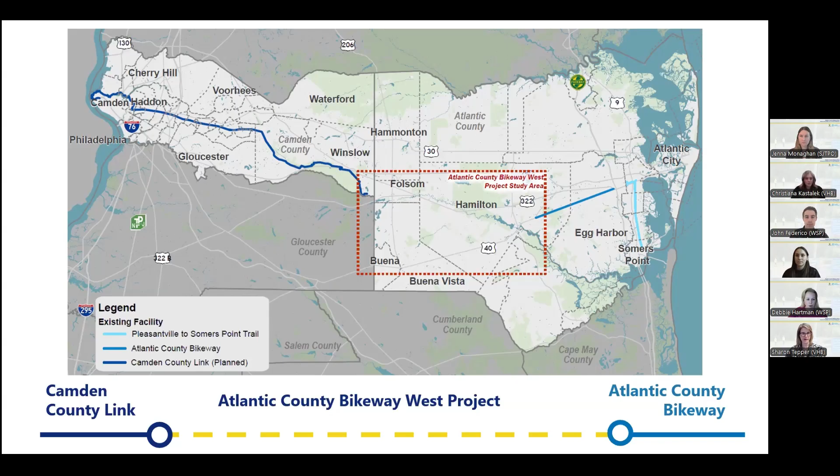To talk a little about how we got to this project point, we began a feasibility study with WSP back in 2020 and 2021. The goal was to connect Philadelphia to Cape May via a continuous off-road multi-use trail network for all ages and abilities. That original feasibility study covered the whole area shown in the red box, looking for a way to connect two bikeways: the existing Atlantic County Bikeway on the east, shown as the lighter blue line, to the planned Camden County link on the west side, shown as the darker blue line. We were looking for a way to connect point A to point B, and that's what we were calling the proposed Atlantic County Bikeway West project.

I'm going to let Christiana take over and start us off with an icebreaker poll. Before we dive into what's being proposed as part of this project, we want to understand how you currently engage with the existing bikeways Debbie just talked through, and other trails in the area. So we'll get started with our first poll of the evening. The polls will automatically pop up on your screen. Once it does, feel free to start responding, then please click submit so we receive your answers. Let me pull up the first poll.

You should have the first poll open in front of you. There's a set of three questions. The first is: how do you generally get around on a daily basis? For this, you could choose all that apply to you, whether you drive yourself, walk, bike, whatever it may be. Choose all the responses that apply to you.

The second question is, have you used the existing Atlantic County Bikeway or Pleasantville to Somers Point Trail before? This is a single choice question. We're looking to understand if you've used these trails before, one or the other, or maybe you haven't used these at all, or maybe haven't even heard of them before. That's what we're trying to understand in the second question.

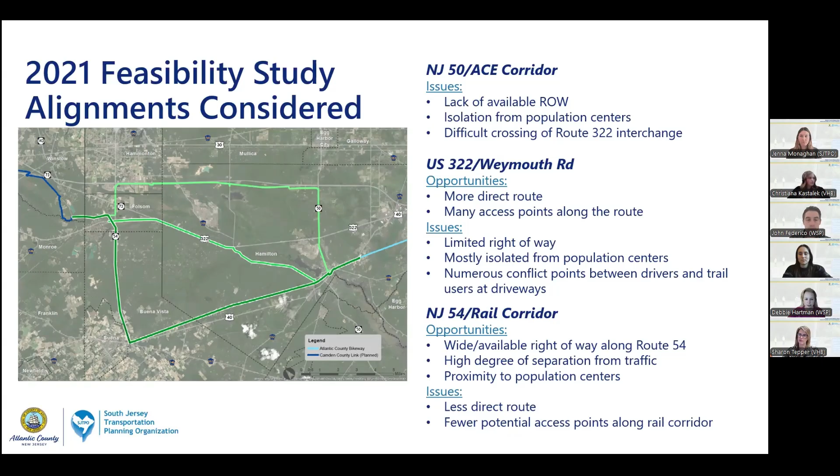Some of the concerns found are that it's a less direct route because it's a right angle instead of a diagonal, and there were fewer identified potential access points along particularly the rail portion of the corridor. That's something we'll continue to look at as the study continues. But that third option, the New Jersey 54 and the rail corridor, did become the preferred initially proposed alignment that came out of that feasibility study.

And that's where this study is beginning, the advanced feasibility and moving into concept development. So this red alignment connects, again, the planned Camden County link to the existing Atlantic County Bikeway to the east. We'll run through a couple of different areas: Folsom Borough, Buena Vista Township in this corner, and finally Hamilton Township, along with a small portion in Camden County. This dark line represents the change between Camden County and Atlantic County, so there's a little portion that will be in Camden County as well.

The reason this was chosen as the preferred alternative is because of that wide right-of-way alongside Route 54, that unused right-of-way for the railroad that parallels Route 40, which gives you that high separation from traffic. There are pedestrian and bike generators in these higher density areas, in the retail areas surrounding Mays Landing, Folsom, and Buena. So within that alignment we came up with 3 focus areas, outlined in the black dashed boxes, numbered 1, 2, and 3, which we'll talk about in more detail throughout the presentation.

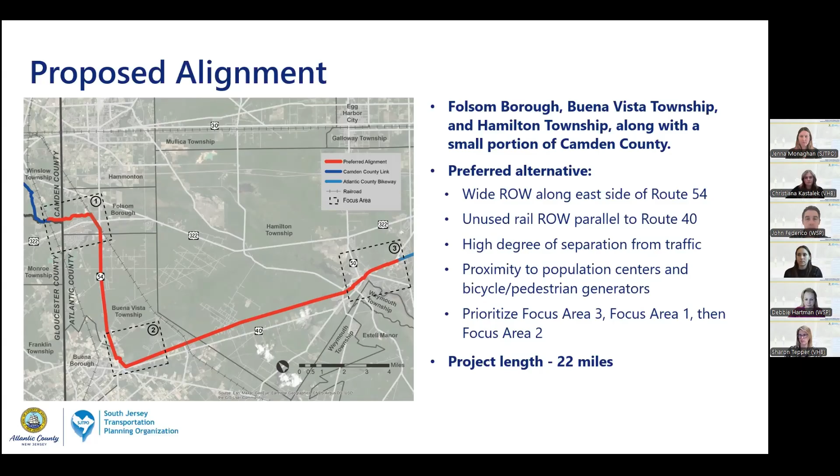When doing the initial feasibility study, we were trying to serve 3 types of users, in no particular order, and I want to explain what these types of users are and how they might use an off-road trail. The first is a community and functional user, somebody who lives nearby and uses the trail truly as a transportation link. They need it to run errands, get to work, visit family. Those are distances of about 1 to 10 miles, again those functional trips.

The second category this is serving is the regional recreational user.

And those might be people that live outside the study area, anywhere that they can drive in, but they want to use that regional trail system to make those longer trips for recreation, for exercise, and or related to tourism in the area. They might have a backpack, they might have camping involved with it, but they're looking at biking 25 to 75 plus miles. They may want to do the whole corridor from Philadelphia to Cape May ultimately.

And then the third category is that local recreational user, and that may be what we see most of here tonight at this meeting. Those are people that live within a short walk or drive of the proposed trail, and they might use it for exercise, to hang out with friends, meet up for a bike ride or a walk or recreation, or take their dog for a walk. Something about less than 2 miles of walking or less than 5 miles of biking, somewhere in those shorter trips for a more regular, maybe not necessarily daily, but a more regular use.

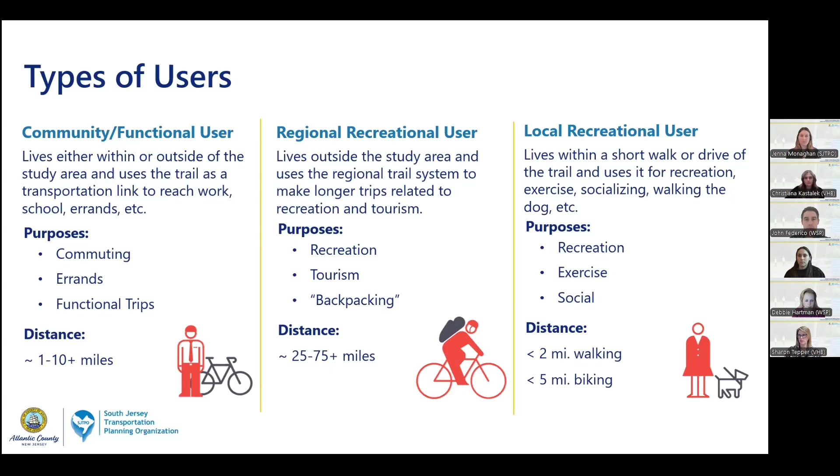So now I want to talk about where we are in the process. I just kind of explained how we got to now, and this is where our path is going forward.

So this stage is going to move us from feasibility study to concept development. Our main purpose here is to develop a feasible trail alignment, and that considers things like physical constraints, things like topography, roadway crossings, and environmental areas, which are prevalent in South Jersey. We also want to make sure that the right-of-way is viable. We have to dig into ownership of each of the parcels and make sure the proper coordination takes place so that we're understanding exactly where this proposed trail might be running.

We want to take a close look at safety and traffic at any crossings of a roadway or a driveway. And we want to consider security either at trailheads or along the route, and maintenance, because obviously there may need to be emergency access, but we want to choose materials that are easier for maintenance so that this trail can be enjoyed by many people.

So what we're working through is, again, a pros and cons of some alignment sub-alternatives, and we'll look at a couple of choices here in the focus areas. This is really heavy on agency coordination at this stage. There are, not just Atlantic County, but also Camden County will need to be involved as well. This runs through 3 different municipalities. We need to coordinate with NJDOT because some of the right-of-way is along their alignment. There's going to be heavy coordination with the New Jersey Department of Environmental Protection, as well as the Pinelands Commission, who has a lot of regulatory land in this area.

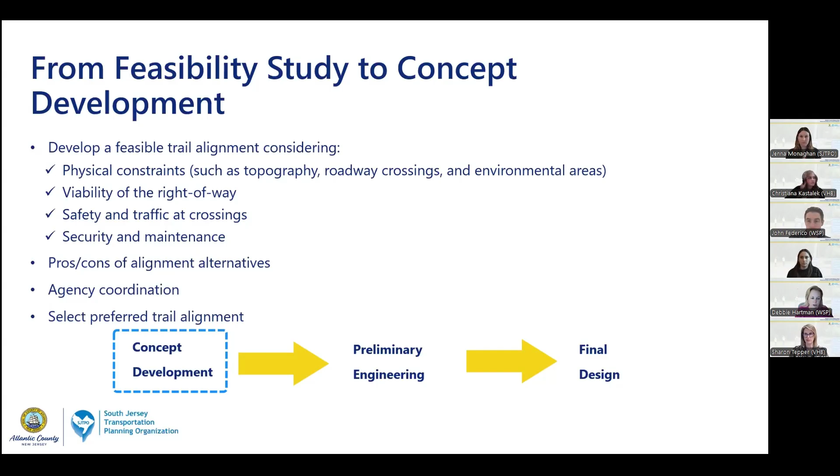So we're in the very early stages of this project. The schedule for this phase, this concept development phase that was in those light blue boxes, started back in November 2025, and we've done a lot of data collection in the time frame now of environmental data, right-of-way data, what structures may be along our proposed route. We're here right now with this first public meeting, so you'll see the public engagement starts now and continues through the entire length of the study.

After tonight's meeting, we're going to move into some of the details of planning of this alignment. So things like security and maintenance, and ultimately over the course of the next 6 or 7 months, work towards coming up with that concept plan for the off-road trail. In the middle of that, we're going to have another event for the public, and it'll be a pop-up event where we'll go out somewhere, like maybe somewhere along a trail, somewhere where we can kind of encounter people out and about on their own terms.

And then after the fall this year, once we have a firm alignment in place, we'll talk about what possible phasing could look like. It's 22 miles. It probably all can't be built at once. So what pieces make sense to possibly advance first, and what's the cost involved with that sliced and diced implementation plan.

And then we'll have another meeting in the fall with the public. Everybody here will be invited as well to talk about the final plan and the phasing and costs. And that will be, again, winter of 2027. So approximately a year or so from now will be the conclusion of this concept development phase.

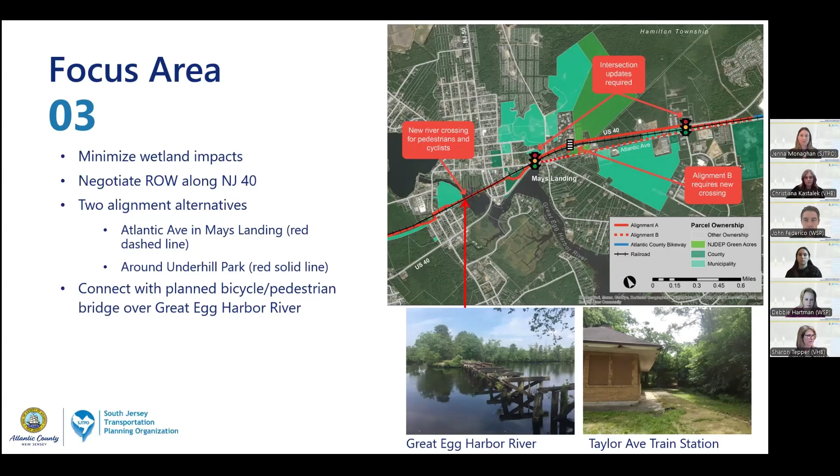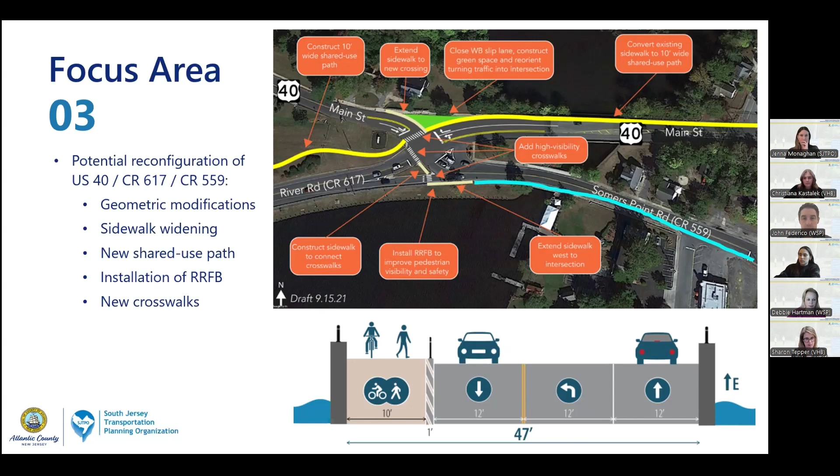Okay, thank you, Christiana. Of course. So with that, there are a couple of questions that have popped up in the Q&A, but before we get to those, looking back at the poll results on what the top priority for designing this proposed alignment should be, around 53% of respondents indicated that access through trailheads and parking should be a top priority, followed by directness of the route, minimizing wetland and environmental impacts, as well as good lighting and pedestrian fixtures.

We also had a comment in the Q&A come up: priority to have least amount of conflict with traffic. That came from Julia Z. I would assume that means with vehicle traffic.

We do have two other questions in here, Debbie. The first is, will any possible on-road alternatives be a separate protected bike lane? That came from Patrick M. That'll be a design detail that's worked out later, depending on the width of the roadway, the right of way, and the jurisdiction of any specific roadway.

And then the last question, from Zachary V.: Can a route go down Main Street and cross the Great Egg Harbor River by the mill? That's not the new crossing we were talking about to the west by the old abandoned train station. The Cotton Mill Bridge is not something that we looked at. I think it's a little bit less direct, and since the project's already underway to rebuild that bridge, there's a lot of momentum there. So we'd want to build off of that, the old train trestle.

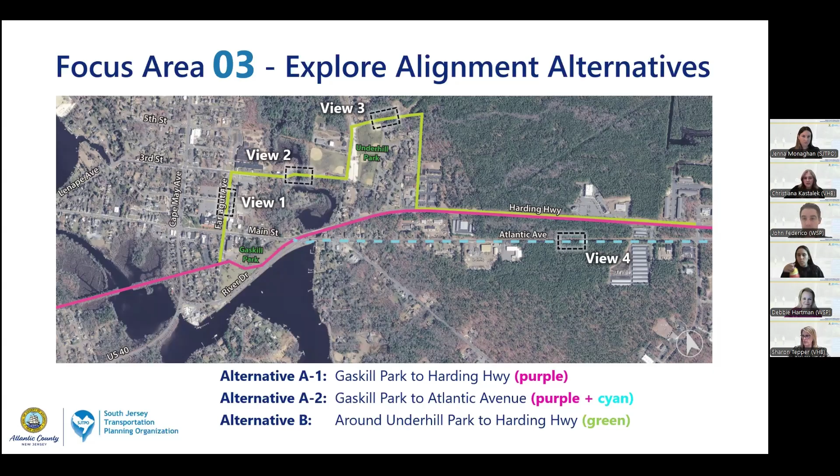All right, Debbie, I'll hand it back over to you. Thank you. Okay.

So again, this is a reminder about what focus area, where we are. A couple of final questions that I want to ask, and Christiana, maybe the best way for people to respond is to type in their answers.

The first one is we want to know are there any sensitive areas, either wetlands, habitats, community concerns that we haven't identified along this portion of the alignment. By this portion, we mean even all those sub-alternatives. This area 3, are there any sensitive areas that we haven't identified?

The second question is where would you like to see entrance or access points into the trail in this area that's in the box, essentially focus area 3? And is there anything else you want to tell us that we should consider about this focus area?

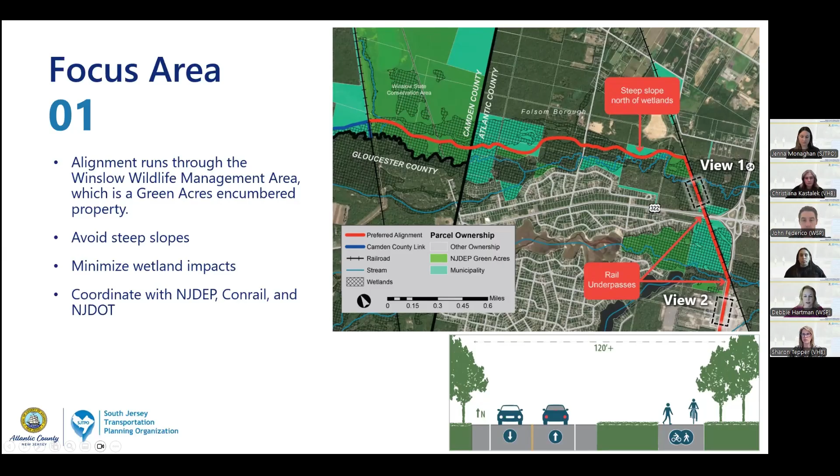So just some photos of the area. This first view is, again, that path that would run alongside the Conrail tracks, which is an active track, maybe just 1 or 2 passings a day of a freight train. So not heavily used, but we do need to run alongside it. And then view 2 is showing that wide right of way that is along Route 54.

So here we want to pop up the same 3 questions that we just asked for focus area 1. There's really no sub-alternatives along this one, just some minor tweakings to do some water crossings or to get around the railroad. So are there any sensitive areas, community concerns, or environmentally sensitive areas that we haven't identified along this portion of the alignment? Where would you like to see entrances or accesses to the trail in this portion? Again, focus area 1 only is what we're talking about. And is there anything else we should consider about this particular focus area?

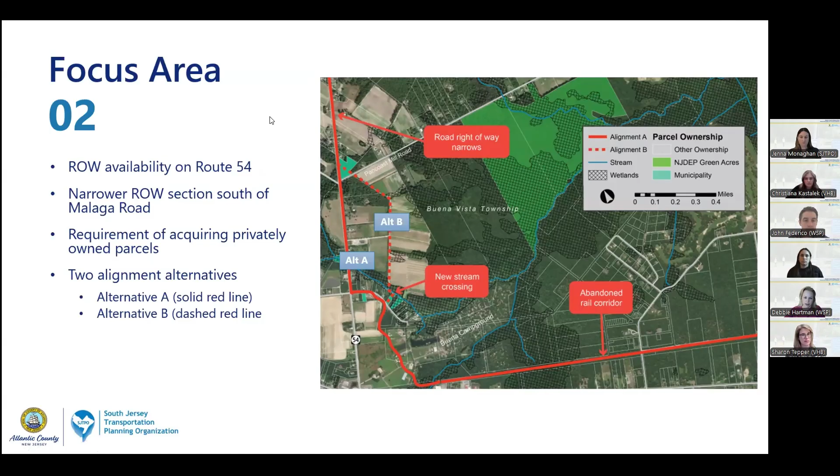So Alternative A runs south along 54 until Fursin Avenue, and then it travels along the south side of Fursin Avenue before continuing to those private parcels that are owned by the Buena Vista Campground.

Alternative B is this dashed line that runs through this green area here, which means this is a municipally owned parcel, so it runs through that first before continuing before Pancoast Mill Road, and then continues through some private properties along this farm road before connecting across Fursin Avenue with a new stream crossing here before again going into the Buena Vista Campground.

Looks like you have another poll for us here, Christiana. That is correct. So understanding and just learning about the two alignment alternatives that Debbie just talked through, we now want to understand from you all as to which alignment do you lean towards right now and why. So this is another short answer question, and we are going to ask why you are leaning towards one or the other.

So I'm going to show some views first. I forgot to show this before you started answering your question, but view 1 is Route 54, that little bit narrower southern section. View 2 is that Alternative B along the farm road, and then view 3 is showing Fursin Avenue. And then we have view 4 on the next page, that is the Buena Vista campground leading up to that trail entrance. And then view 5 is finally that abandoned rail corridor that we would be able to use.

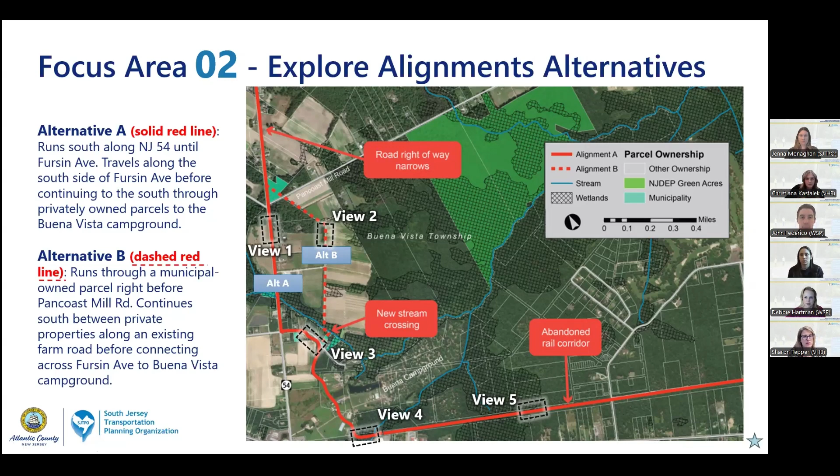Okay, so this last image is again our set of 3 questions for you. Are there any sensitive areas such as wetlands or community concerns that we haven't identified yet along this focus area 2 that is outlined? Where would you like to see entrances or access points for the trail in this area? And is there anything else we should be considering about this particular focus area? Take a few minutes.

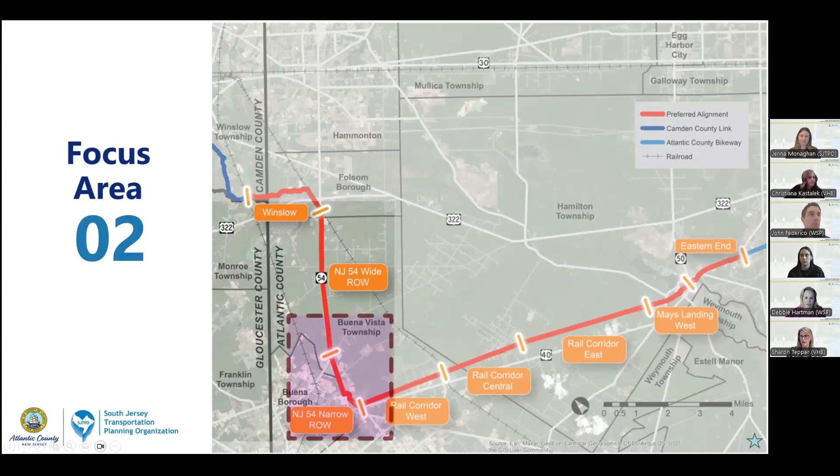Thanks, Christiana. Now I want to run us through the next steps for the project. We just completed our data collection, this first phase, and now we want to move into updating our economic analysis. That'll involve refreshing some of the demand data we used during the initial feasibility study—it's been 5 years. We're also going to work on what a security and maintenance plan could look like.

We'll take the input from today, as well as go back out in the summer for pop-up events to get more input, and work on refining what the preferred alignment or sub-alignments are, so we can start putting together an off-road concept plan. We'll bring that back in the fall to another public workshop so everyone can see and comment on it.

So right now we wanted to open it up to a question and answer period. I'll let Christiana take the reins here on fielding questions. If you'd like to ask a question or provide a comment on anything you heard today, either raise your hand and speak out loud, or put it into the Q&A.

We have one question, from Joseph A.: has there been consideration for accommodations for food trucks, etc., at various trailheads to provide stops along the way? At this point, that hasn't necessarily been a driver in our analysis. First we want to locate where those trailheads would be, where they make sense and where there's demand for them. Then I believe it would depend on what type of zoning there is, and that municipality's specific rules or ordinances related to things of that nature.

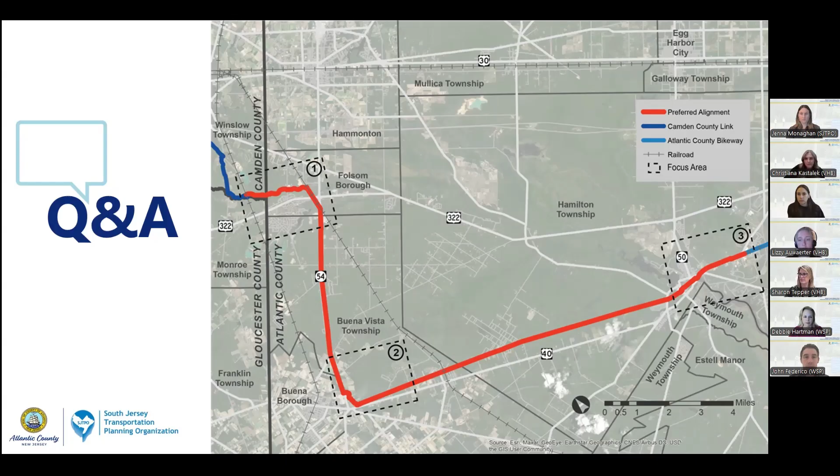All right, Debbie, I think it's pretty quiet, so I will hand it over to you.

I just want to note, Joe did have one last question that came in. Christiana, do you want to? Yep. His question, this is from Joe L.: can this bikeway be connected to the New Jersey State Long Trail that is being built? Okay, we'll have to look at what that alignment is and where that runs. I'm not sure where that is. I'm not familiar with that either. All right, so we could look into that. Thank you, Joe, we appreciate your questions and comments throughout the evening.